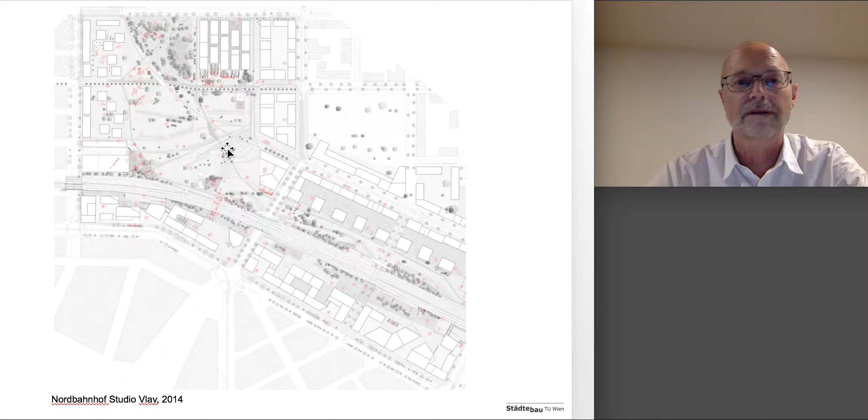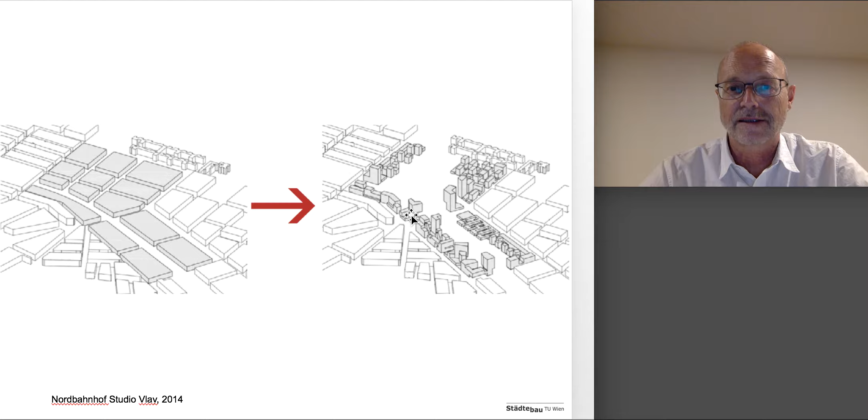So this was the idea, to move out, to keep the amount of built-up space, of course, that was a kind of requirement, but to make it high and dense along the existing infrastructure and leave it as it is in the middle.

To compare, what the city would have to build are the streets, the infrastructure, the pipes, the tubes, everything you have in the streets, the canalization, the water supply, the electricity, everything. This would have been the amount of infrastructure that should have been built in this area. And they said, no, we don't do that. We keep it outside. Here you see it even better.

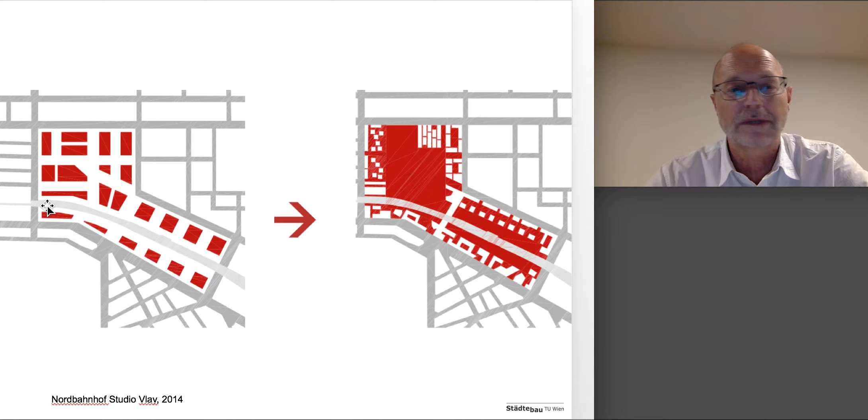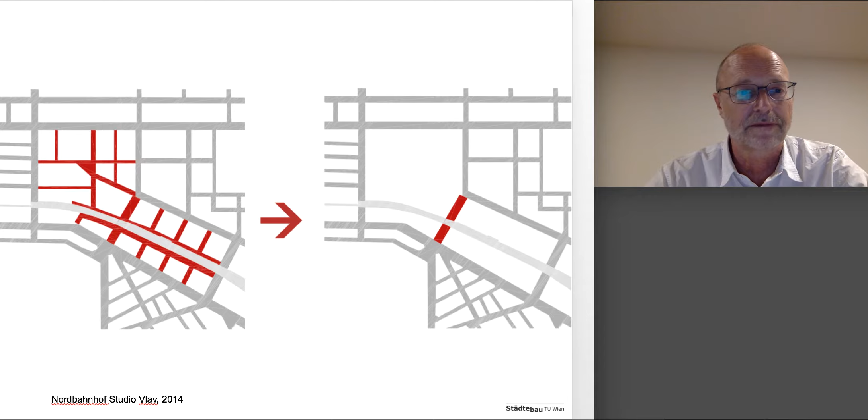You see the streets that have to be built, but they said we just need one. And we keep all the constructions along the existing infrastructure. That makes them a bit higher. That makes them a bit more dense, but easily accessible.

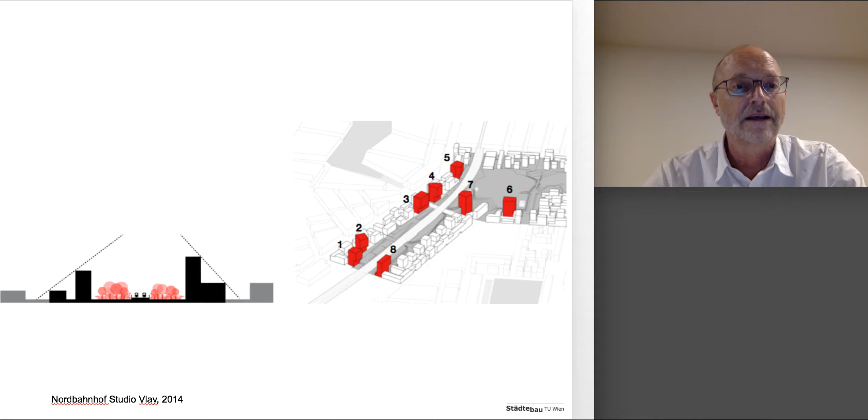It's a couple of high-rise buildings, but we can provide enough light for the neighboring districts as we step back to this forest where they don't disturb, the shadow doesn't matter. So this was the idea that made this project win. A lot of accessibility, even from the neighboring districts into the park, visually and by walkways.

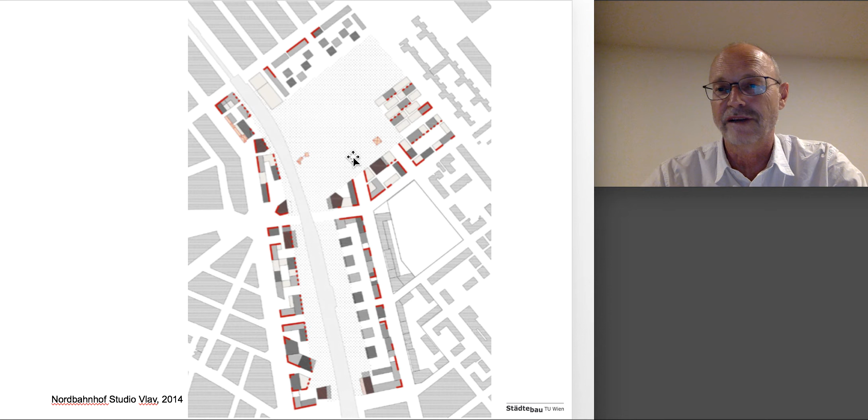And at the end, a structure that is definitely different from the residential block of the Viennese neighborhoods, and a totally new solution to this kind of urban development as we saw it in between.